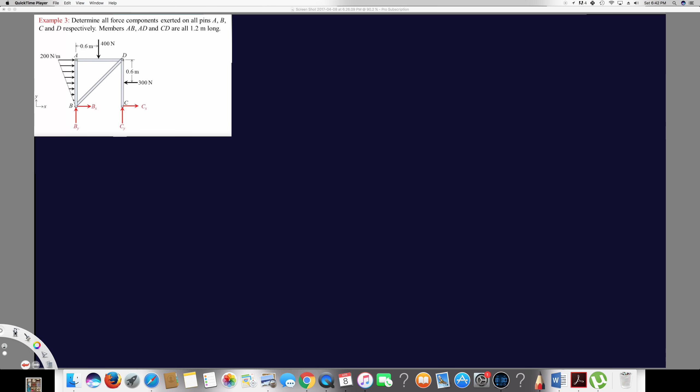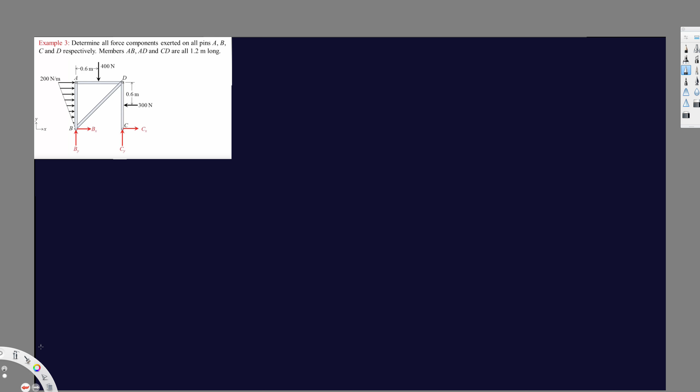Let's do this problem right here. The question is asking: determine all force components exerted on pins A, B, C, D respectively, and they are also saying members AB, AD, and CD are all 1.2 meter long. So let's see how we can solve this.

So first of all, in this kind of frame question, we have to separate all the components and solve them separately. So in this case, I have to take AB first. So if I take AB first, let's see what happens. So this is A, this is B. So B has two forces, a horizontal force, that's Bx, and a vertical force By right here.

And A is also going to have Ax, Ay. Their directions are just an assumption. It doesn't matter which direction you choose. The answer will give you the details, because if you get a negative answer, that means the force is acting opposite to whatever direction we have taken.

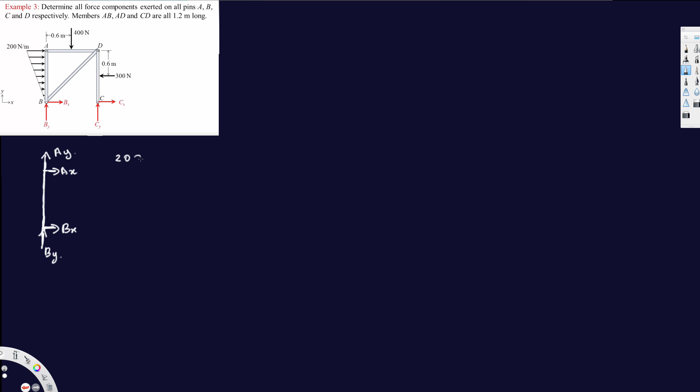So in this case, we have one more thing, that distributed force right here. It's a triangle shape, so I have to take the area of the triangle. Area of the triangle is height times the length divided by 2. So height is 200, and the length is 1.2 meter. They said every component is 1.2 meter. So we multiply by 1.2 and divide by 2. That gives us the distributed force: 100 times 1.2, so 120 Newton.

And for a triangle, the distributed force is going to be acting at 1/3 of the length. So in this case, we know this is 1.2 meter distance. Therefore, 1/3 of the 1.2 meters is going to be 0.4. So let's say this is 0.4. So the distributed force of 120 Newton is going to be acting exactly right here. So that's the only thing we have to know.

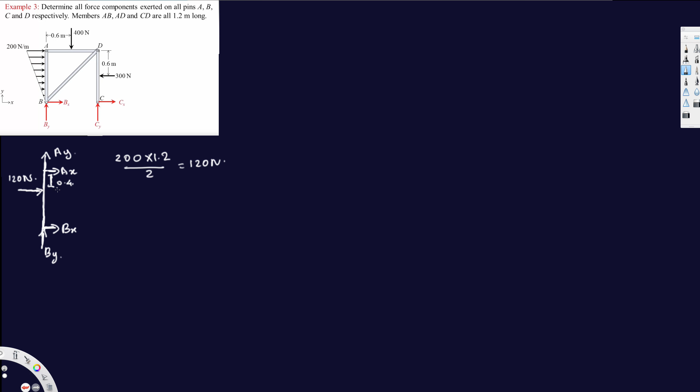And from this, now I can calculate the forces by taking moment around something. I can take moment around B or moment around A. It doesn't matter, both will give you the same answer. So let's take moment around A, taking counterclockwise positive. This is equal to 0 in statics, and we have 120 Newton acting at 0.4 meter distance. That's counterclockwise, so it's going to be positive.

120 times 0.4, and we also have Bx acting in the counterclockwise direction, so it's going to be positive too. Bx, we know this total distance is 1.2 meter, given right here. So Bx times 1.2 is equal to 0. And if I solve for this, 1.2 Bx comes out to be 120 times 0.4.

If I bring it to the other side, it's negative. Then Bx is minus 120 times 0.4 divided by 1.2. That will give us minus 40 Newton. And we are done with this Bx part.

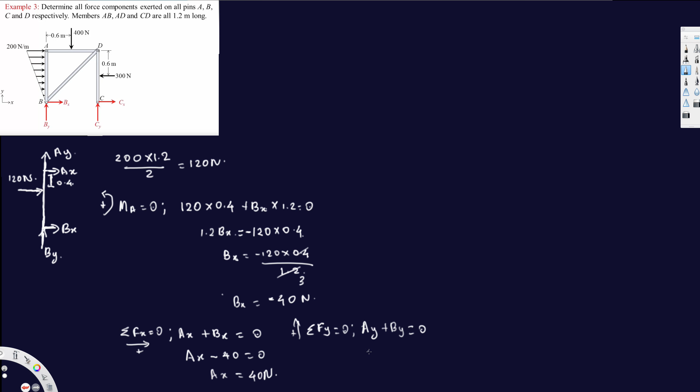So these are the two pieces of information we got from this frame, and I can also form another equation, sigma F of y. Taking the upward direction positive, we have Ay upward, so positive, and By also upward, so positive too, equal to 0. These are the only two vertical forces, therefore Ay is equal to minus By. So we know this relation.

So we have Ax right here and Bx right here. Now we have done everything in the AB component. Let's move to the AD component. What we have to do is, whatever force we took on that member, we have to take in the opposite direction on the other side. So if Ax is acting in this direction, here it is going to be acting in the opposite direction. So it's going to be Ax right here, and Ay is going to be acting downward.

And also we have 400 Newton, 0.6 meter from this one. So this is 400 Newton, 0.6 meter from this one. And also we are going to have dx and dy. So let's assume this direction, dx, dy.

So if I can solve one of them by taking moment around something, like for example, if I take moment around A, let's see what happens. So I separate this one right here. If I take moment around A and take counterclockwise positive and solve for this one, I will get 400. It's acting clockwise, so it's going to be negative. Negative 400 times 0.6. Then this is also negative because acting clockwise, so minus dy times the total distance is 1.2 meters, so minus dy times 1.2 equal to 0.

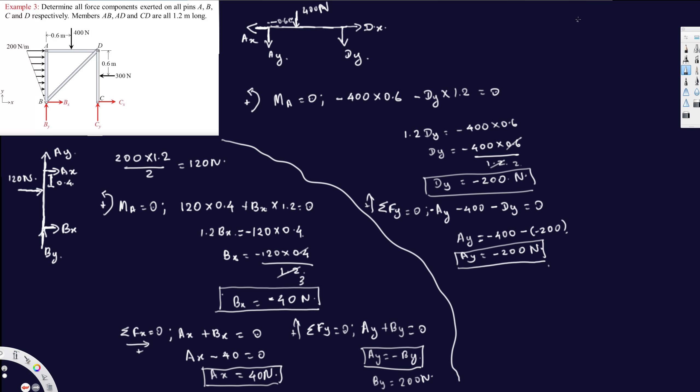Okay, so let's move to the other component. So we have DC right here. So let's separate this one. So if I take DC component, we are going to have dx and dy, but in this case this is going to be different because we have this diagonal component. This diagonal component right here is going to change everything. So we shouldn't say this is dx. Let's say this is d prime x, and this is d prime y, and this is C. We are going to have Cx right here, and Cy right here.

Then we also have 300 Newton acting 0.6 meter away from D. So from this one I can calculate Cx because it creates a moment, right? So I can calculate Cx, and therefore I can calculate the d prime x. So let's do that one. So if I take moment around D, counterclockwise positive, and set this to 0, let's see what happens.

So we are going to have 300 Newton acting clockwise, so it's going to be negative 300 times 0.6, and also we have Cx acting counterclockwise, so it's going to be positive Cx times this 1.2 meter distance, because the total distance is given in the question. These are the two things that create the moment, so we can equate this to 0, and therefore 1.2 Cx is going to be equal to plus 300 times 0.6, therefore Cx is equal to 300 times 0.6 divided by 1.2, which will give us 150 Newton.

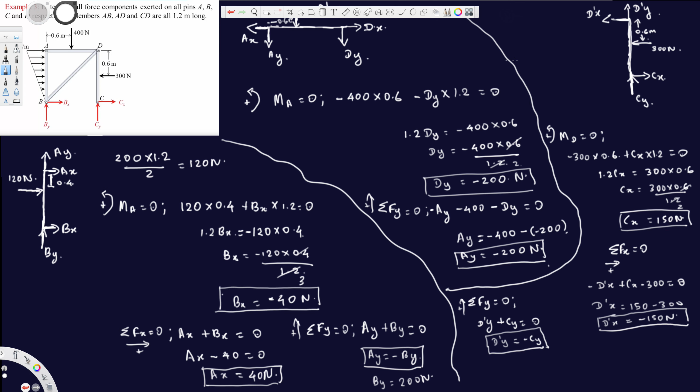Okay, so let's do this one. I'll draw it here to avoid confusion. So let's say this is D. D is going to have force d prime x; if it's this direction, we are going to have d prime x in this direction. And d prime y is acting in the upper direction, so here it's going to be down, d prime y.

And this D point is also going to have these forces in exactly the opposite direction. So let's say this is dx, and therefore it's going to be right in this direction, and if I take dy downside, it's going to be acting upside. So from this one I can solve. Also we have another force right here, the force created by this diagonal. Let's say that is Fd. We can calculate that one by solving this one.

Also we know this angle right here is going to be 45 degrees, because the height is 1.2 meters and the width is 1.2 meters. If we have equal distances for the opposite and adjacent, tan inverse gives you 45 degrees. So we know that angle, so we can calculate this one, and then from this one it's easy to calculate dy, dx.